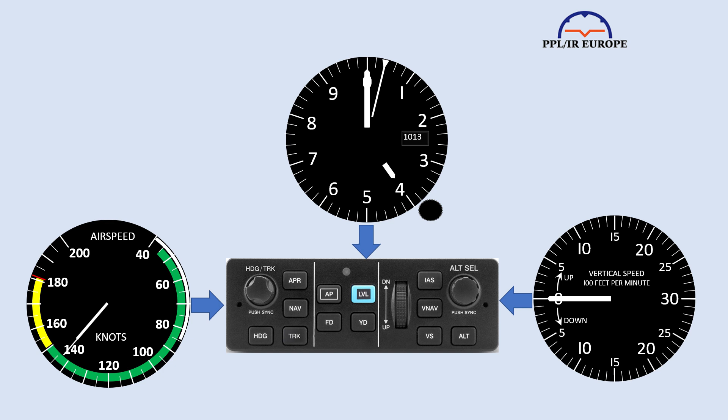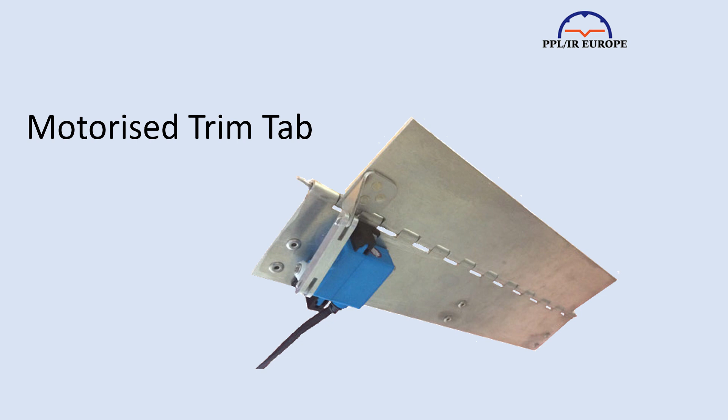Most autopilots use a servo motor attached to the control linkages to move the controls, but some, such as the TrueTrack Echo, use small motorized trim tabs. Trim tab-based autopilots can be cheaper and lighter because the motors need to exert less force, but the results are a little sloppy, as we know from trying to hand fly using only trim.

Many autopilots have automatic pitch trim control, which trims out forces on the servos. This can be a great workload reliever, but carries the additional risk of trim runaway, whereby the servo keeps running, applying greater and greater forces, which can eventually overwhelm the ability of the pilot to control the aircraft. On installations in our kind of aircraft, auto trim is only found in pitch.

Some autopilots incorporate a flight director. This gives you an attitude target on your AI to follow even when the autopilot servos are disengaged. On many aircraft, it is standard practice to always fly with the flight director set up. Apart from making your hand flying more accurate and easier, this also means that you can always engage the autopilot and it will be in a useful mode immediately.

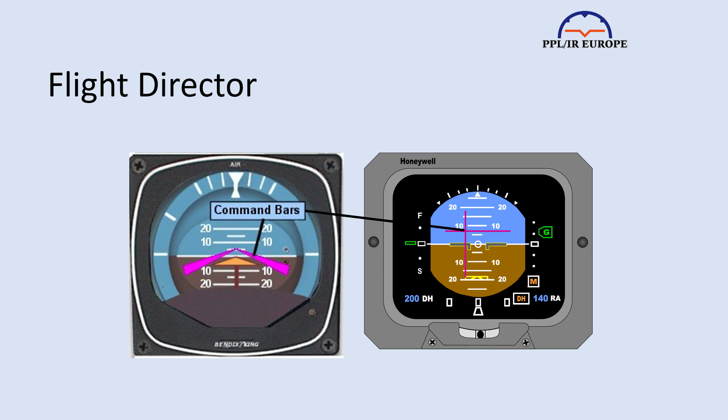Obviously, if you use it in VMC, particularly under VFR, you must make sure that you don't focus too much attention on it to the detriment of lookout.

Let's talk about different operating modes. Nowadays, autopilots can have a huge variety of operating modes. It's worth understanding which modes your autopilot supports and how to engage and disengage them. The following terminology is typically used in GA autopilots.

It's common to refer to raw and coupled modes. The raw mode maintains an attitude in either pitch or roll. Coupled modes slave the raw mode to a specific performance input and use pitch or roll to produce a performance output to maintain a set parameter.

The coupled modes vary with the sophistication of the autopilot. Coupled inputs can be indicated airspeed, vertical speed, heading, track, radial, approach, LNAV path, GPSS, VNAV path. Each has limitations which must be understood when they're used.

Wings level, the most basic mode offered by even the simplest single-axis autopilots, keeps the wings level or zero rate of turn. Such autopilots are often referred to as wing levelers, and even this very basic functionality relieves the pilot of a good deal of workload. In an ideal world, keeping the wings level would result in flying in a straight line, but in the real world, they eventually do tend to drift off heading.

Roll mode adds the ability to put the aircraft into a steady turn. Most, but not all wing levelers also have a roll mode. This is used to adjust heading to remain on track and to turn to the next desired track. Usually in roll mode, the angle of bank or rate of turn is controllable through a wide range.

Altitude hold holds a defined altitude by varying pitch. Some autopilots have an altitude hold without a pitch mode, meaning that the pilot must manually control the aircraft onto a desired altitude and press a button to hold it there.

But it's more common for the altitude hold either to be selected automatically when the pitch control is centralized, or on a button press, which disengages pitch mode and maintains altitude.

On some autopilot installations, the desired altitude can be pre-selected in the climb or descent, and the aircraft will level off smoothly at that altitude. This might be done on the autopilot panel itself, on an altitude selector on the panel, or on the PFD.

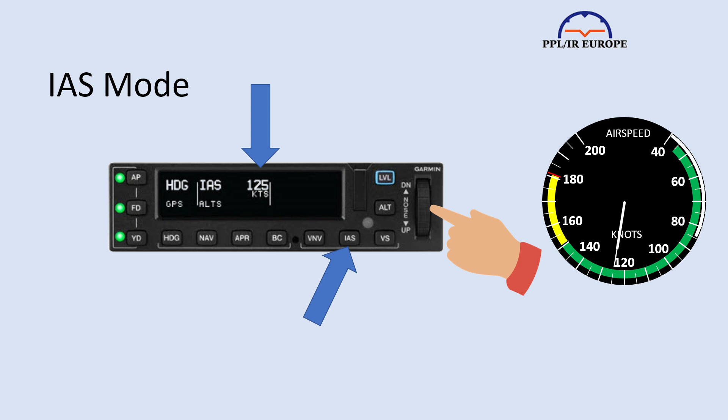Indicated airspeed mode holds an airspeed by varying pitch. Some autopilots call this flight level change, or FLC. Many consider this the safest way to climb, as it can never stall the aircraft, as it will pitch to maintain airspeed at the expense of vertical speed. This is particularly important for normally aspirated piston engines, which lose power as altitude increases.

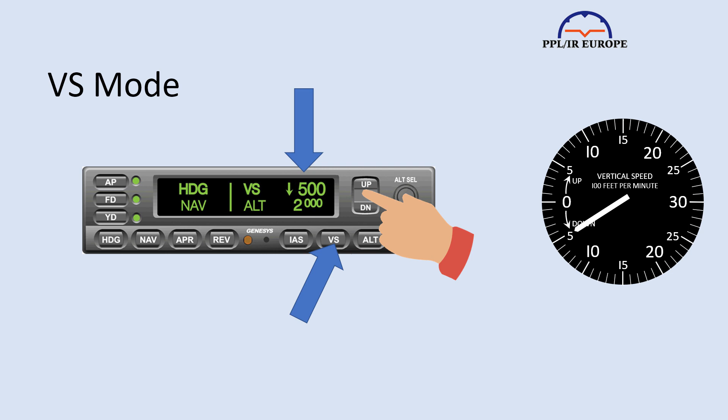Vertical speed holds a defined vertical speed by varying pitch. This is the normal mode to use in descent, as we do not want excessive descent to protect passengers' eardrums, but it can be hazardous in climb, as it can drive the aircraft into stall and spin as the engine power reduces with increasing altitude, to the point where airspeed is reduced dangerously.

Approach mode horizontally intercepts and follows a navigation course with a high degree of sensitivity. In many instances, this is best achieved by setting the mode on an intercept heading shortly before intercepting the final approach.

Some autopilots only track laterally, like a nav mode but more sensitive, but in most autopilots with an approach mode, there's also a vertical mode, waiting until glide slope or glide path intercept and following it down.

Some autopilots will only arm the glide slope or glide path if the aircraft has been on the center line and below the glide slope or glide path for a period of time, typically 20 seconds, which equates roughly to two-thirds of a mile, and often only if the altitude mode is engaged.

Others have a method to intercept the glide path at any time, even from above. On 2D approaches, and in autopilots with no glide slope or glide path capability, the horizontal profile only will be followed, so the vertical profile must be managed manually, or using vertical speed or pitch mode.

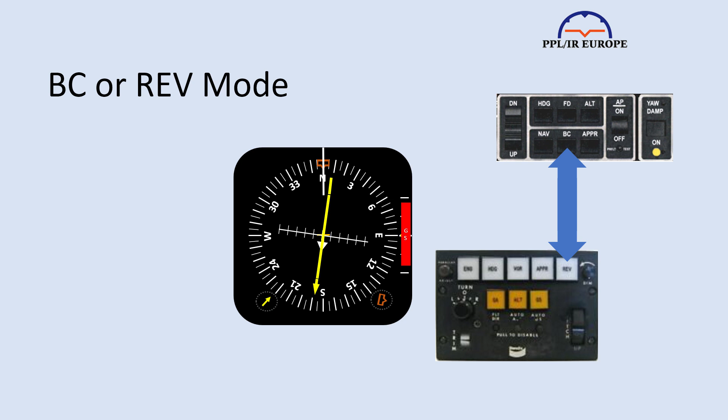Back course, often marked REV for reverse, for flying back course localizer approaches. These are now so rare that I'll only mention them in passing.

Envelope protection: some modern autopilots will limit speed by pitching up and down and refuse to fly into a stall or pass VNE. Similar limits can also be applied to bank angles.

Recently, systems with full-time stability protection have become available. These will apply a force to the controls to resist an unusual attitude, even when the pilot is hand flying. At least one implementation will engage the autopilot in level mode if the pilot doesn't correct things after a few seconds.

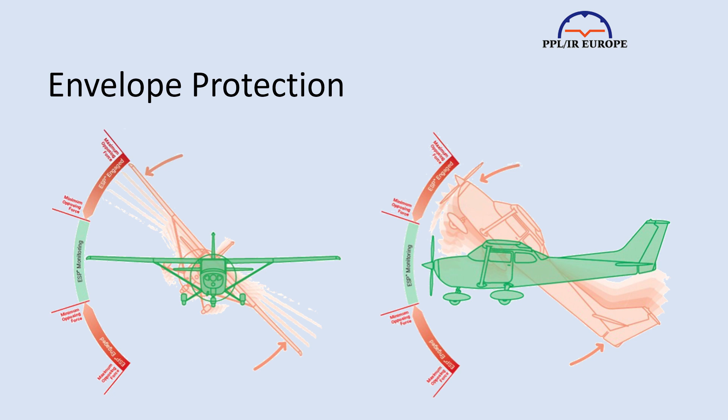Control wheel steering: while the CWS button is pressed, the autopilot will be disconnected, and when the button is released, it will re-engage to hold the pitch at which the button was released. Some autopilots will engage wings level horizontally, and some will try to follow the bank or rate of turn when the button was released.

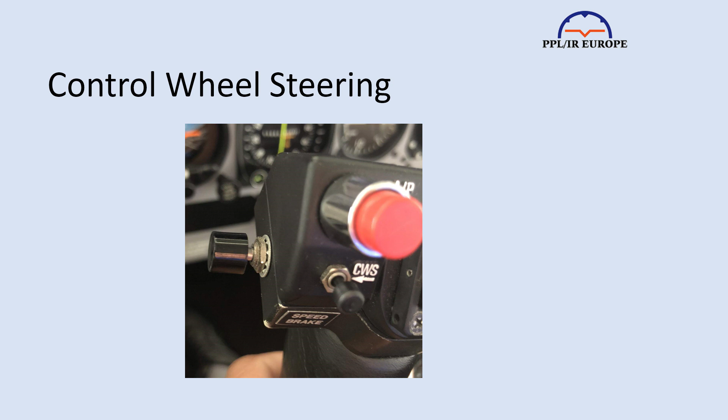Sync. In flight director mode, pressing the sync button will align the flight director with the current aircraft attitude. This is particularly useful when the pilot has established a climb or descent.

Level, not really a mode in itself, but many modern autopilots have a button which will automatically engage wings level and altitude hold.

Takeoff go-around, or TOGA, again not really a mode in itself, but on many autopilots this will engage wings level or nav mode horizontally, and pitch to a pre-programmed attitude, typically around 8 to 10 degrees vertically. The TOGA button is normally on the throttle or power lever, as the pilot is required to manually add power as required, so normally presses TOGA as the throttle or throttles are advanced. TOGA is usually engaged at the threshold before power is applied, but it's important to note that it must not be used for rotation pitch, only as an attitude to be adopted after takeoff.

Armed. Many interfaces, especially glass cockpits, will annunciate to the pilot that a mode is armed. This is usually done by colour, often green and white, but also by depiction. Pilots need to understand the annunciations in the combination they're flying.

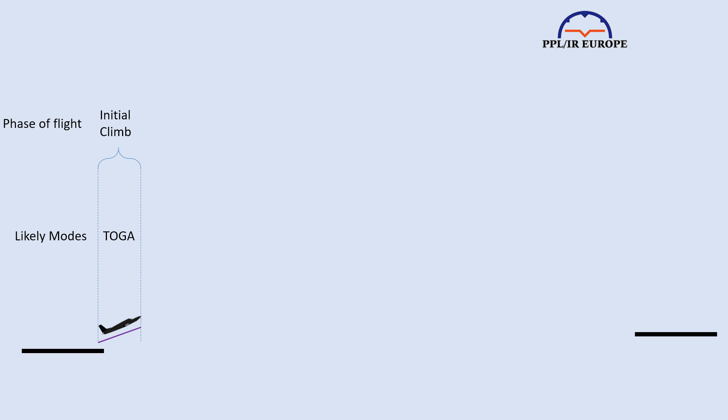So, to summarise, different autopilots will be in different modes for different phases of flight. I'll give an example of a reasonably capable autopilot. If you use it for the initial climb, it may well be in TOGA. Many pilots will be hand flying but following the flight director at this stage, though if the autopilot is cleared for use at low level, it could be engaged.

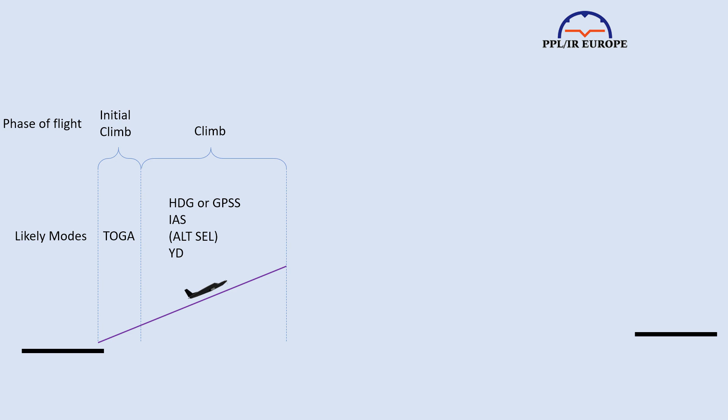In the climb to cruising altitude, if you're flying vectors, you'll be in heading mode, but if you're on your flight plan, you'll be in GPSS mode. You're likely to set indicated airspeed mode to prevent stalling, with your cleared altitude or level pre-selected so the autopilot will level off there. You would also set your yaw damper if you have it. If you have altitude select, then the autopilot will go into altitude hold at the top of climb. And by now, you're probably no longer on vectors, so GPSS is engaged and we fly the magenta line.

To start the descent, we set the cleared altitude and engage vertical speed mode. The vertical speed is going to depend on when we need to be level, but we are aiming for 500 feet a minute in unpressurized aircraft and maybe 1500 feet per minute in a pressurized one. We may need to adjust power so we do not go too fast, also bearing in mind turbulence. We probably start our descent on GPSS following an arrival or direct, but at some point we'll probably be on vectors and therefore in heading mode.

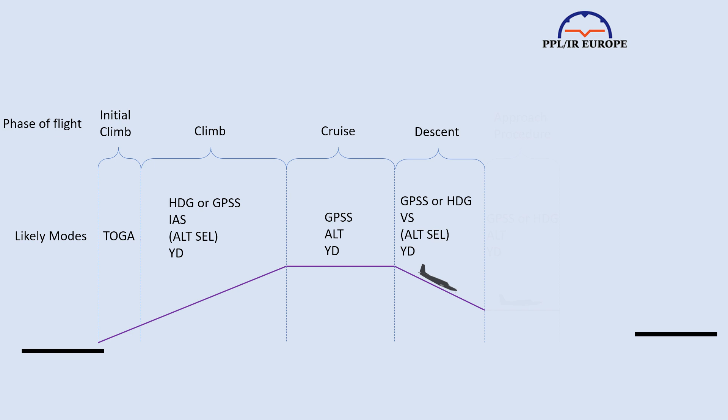Once we reach our cleared level or altitude, altitude mode will engage. In reality, we may well get a step descent, in which case we have to swap between vertical speed and altitude. This is one good argument for trying to manage the descent so that we get our next descent clearance before we level off. If we're flying a procedure, such as an RNP approach, we'll be in GPSS mode, but if it's radar vectors to the ILS, we'll be in heading mode.

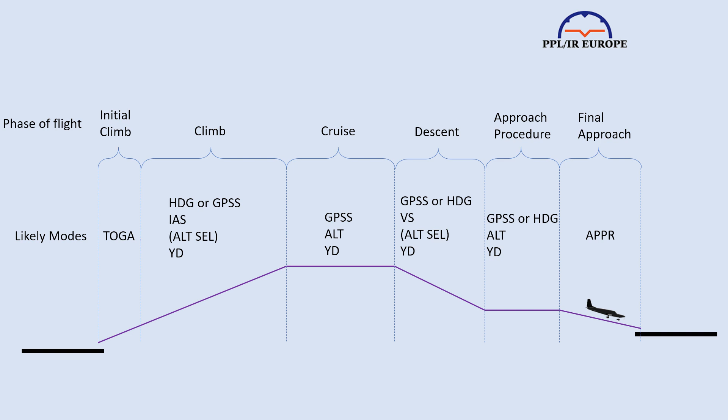Shortly before intercepting the final approach, you engage approach mode. It puts you on the localizer or final approach track, flies you down the glide path, and you're there. You disengage your yaw damper before landing. If you go around, it's back to TOGA, and the sequence starts again.

Obviously, if you don't have such a sophisticated autopilot, you make do with what you've got. So you might have to use pitch mode up and down, and just carefully monitor airspeed and rate of descent. You may be limited to heading mode and steer the magenta line using that. It's horses for courses. Annoyingly, the interfaces of different autopilots have just enough in common to catch you out, but not enough in common to be able to jump in and transfer from one to another.

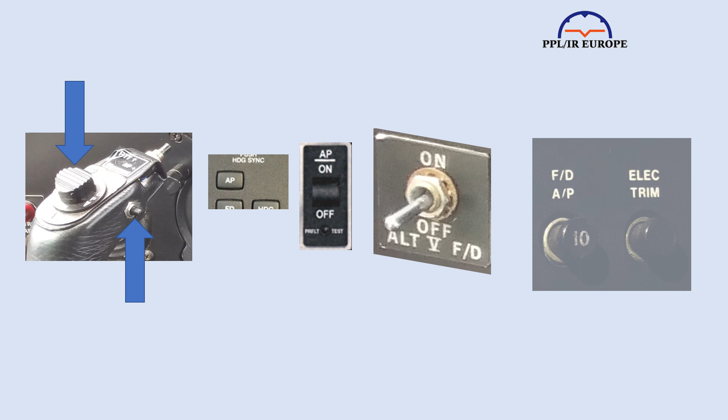Because of the risk of trim or autopilot runaway, which can very rapidly make the aircraft uncontrollable, the most important thing to know about your autopilot and auto trim, if you have it, is how to disconnect it. Most autopilots and electric trim can be disconnected in a number of ways: a disconnect button on the control yoke or stick, moving the electric trim switch on the yoke or stick, a button or switch on the panel mounted unit, a separate switch on the panel, pulling a circuit breaker, or if all else fails, cutting power entirely with the master switch.

Electric trim runaway can happen both when the autopilot is engaged and when it's disengaged. Make sure you know how to stop it: pulling a circuit breaker, a switch on the panel, and again, if all else fails, cutting power entirely with the master switch. As I said before, autopilot and trim runaways can happen very fast and can be very dangerous, so the actions to disconnect and recover must be memory items and regularly practiced.

It's worth highlighting the circuit breakers for your autopilot. You can get hold of small collars for this, or just use nail varnish. If the time ever comes, you don't want to be hunting for the right circuit breaker. If the circuit breaker can't be pulled, you might want to replace it with one that can be.

All autopilots have pre-flight checks which must be completed. Some will refuse to engage in flight if this hasn't been done, but many will run just fine.

Just about every model of autopilot does something different when you engage it. Some will go into wings level, some into track hold, some into pitch hold, and others will have no vertical mode at all. Some autopilots always control pitch and roll, some can be used in roll independent of pitch.

Some modes can be armed before they're active. This is almost ubiquitous with nav and approach mode, where it is armed well before you reach the final approach track and activates itself to perform the intercept.

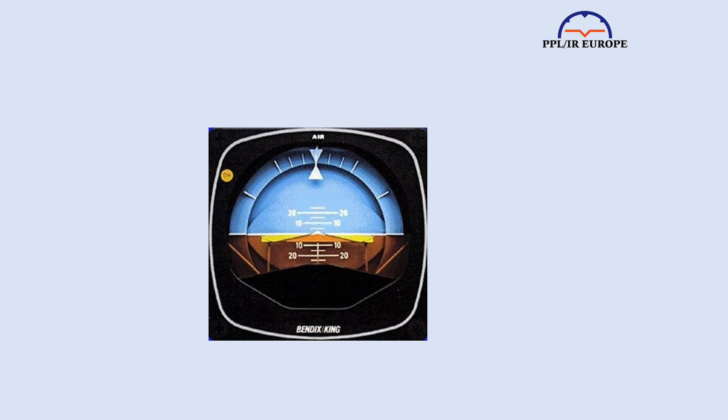If you have flight director, put it on first and check the command bars lie under the aircraft symbol. If the autopilot has a pitch and/or trim doll's eye, make sure they are centered before engaging.

You can try saying aloud what you want the autopilot to achieve, e.g. arm altitude capture for 4,000 feet. Touch the button and make sure it's the correct one, saying altitude arm. Then push the button. Close the loop by reading the annunciation, 4,000 feet alt armed.

Often in glass cockpits, such as the G1000, white is armed, green is engaged, but that can't be relied on in all installations. On many self-contained autopilot displays, it's monochrome but uses the word arm or armed. Working slowly through this is better than rushing. There should never be a reason to have to engage the autopilot quickly, except possibly in the case of the level button, which is still a relative rarity.

As I've been saying throughout this video, all autopilots are different, sometimes very significantly so. If you're going to fly an aircraft with an autopilot that's new to you, make sure that you are briefed on it before you go. I'll end up with the kind of things that you would be making sure you understand. I've put this checklist in the comments, and it's also in the advisory on the website.

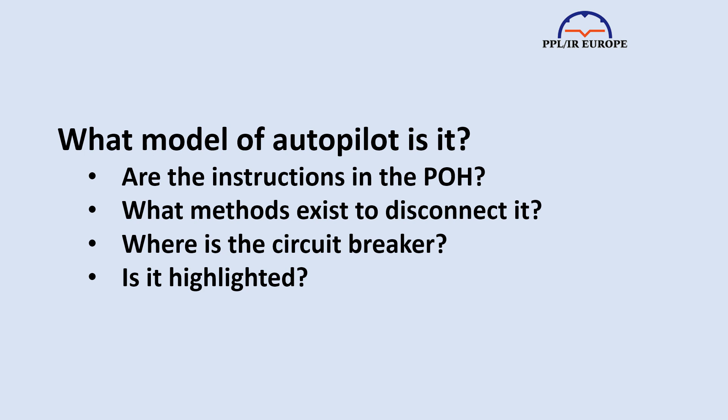What model of autopilot is it? Are there instructions in the POH? What methods exist to disconnect it? Where is the circuit breaker? Is it highlighted? Does it have electric trim? What methods exist to disconnect it? Where is the breaker? Is it highlighted? What is the primary input source, attitude or rate of turn?

What are its failure modes? How can it be monitored? Under what circumstances will the autopilot disengage itself? What pre-flight checks are required? What limitations does the autopilot have? Minimum height, speed envelope, icing?

Does it have control wheel steering? What happens if you press the control wheel steering when the autopilot is off? What modes will CWS place the autopilot into after use? If the aircraft is in an unusual attitude when CWS is released, what will the autopilot do?

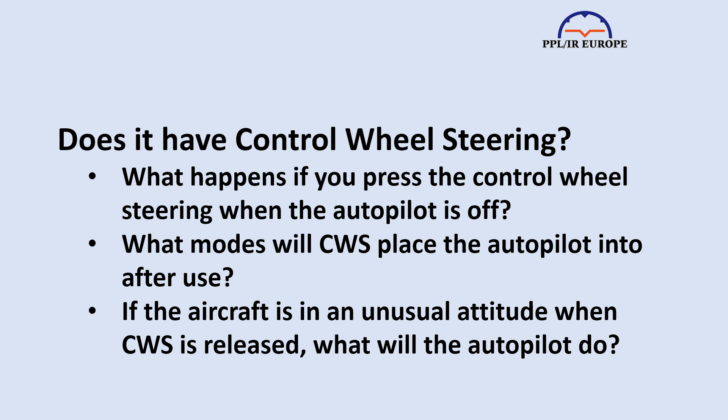Does it have flight director? How do you engage it? How do you disengage it? How do you go from flight director to full autopilot and back again?

Does it have any kind of envelope protection? Does it protect against pitch angles or airspeed excursions or both? Is that protection active when the autopilot is off? Can that protection be overridden?

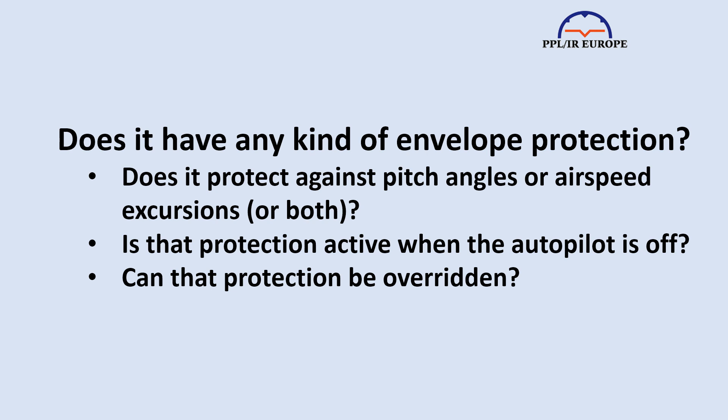Does it have yaw damper? What are its limitations? Are there any circumstances when it's required, recommended, or prohibited? How can the autopilot be engaged? What mode will it be after being engaged?

Does it have a level button? If not, how do you quickly enable wings level and altitude hold modes? What modes does it have? Can horizontal modes be engaged independently of vertical ones?

Are approach and nav mode armed or entered directly? How do you maintain current heading while intercepting the nav or approach course? Does approach mode glide slope capture require a certain amount of time with the localizer captured?

If you're new to the aircraft or autopilot, take your time getting to know the autopilot thoroughly. Until you've built up experience and confidence, be prepared for the unexpected. In critical situations, e.g. leveling off in controlled airspace or intercepting a final approach course in IMC, be ready with a plan B, which might well be to disconnect the autopilot and fly manually. You can think about what went wrong later on the ground.